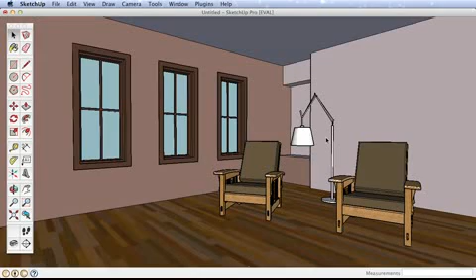In this video, we'll create an interior room, something you may create to test out paint schemes or furniture arrangement. We'll build out the basic room, apply some simple colors, and then use the 3D Warehouse to find furniture we can put in and arrange.

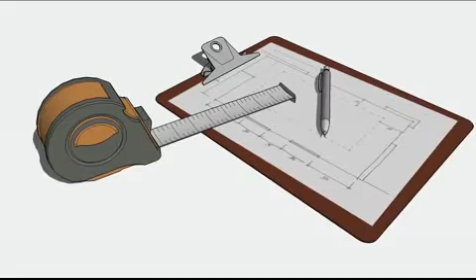If you're creating your own space, the first thing you'd need to do is take some basic measurements of the size of the room and where windows or other prominent elements are, to accurately recreate the space. We know how to draw accurately in SketchUp from the previous video. For our example, let's begin by drawing a room that is 20 feet long by 16 feet wide, and pull it up to 9 feet.

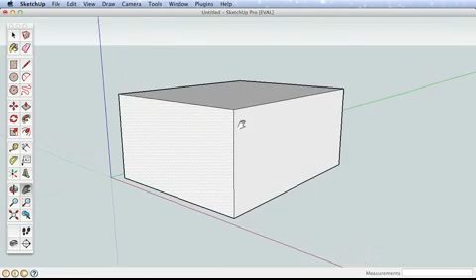When you're working only on an interior room, it's often helpful to erase some of the walls, and we can always draw them back in later. Using the eraser, erase this corner edge, which will delete two of the sides. You'll see the inside surfaces are a different color from the outside surfaces where we've been working, but it will have no effect on our example, since we're going to paint these surfaces anyway.

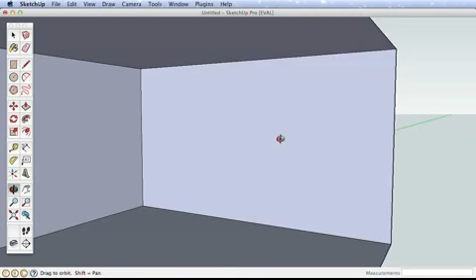Navigate to get a good view of this back surface. Let's use a new tool to help us lay out some guidelines. The tape measure tool can measure between points in SketchUp, but will also create guidelines we can reference.

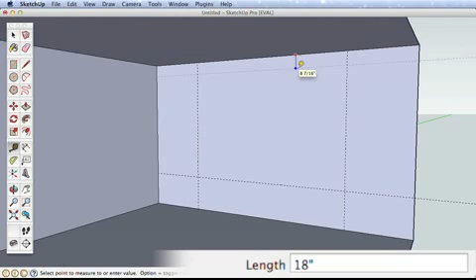Click on this corner edge and pull away. Type 40 inches to create a guide 40 inches from that edge. Now repeat this process from the opposite edge. Create a guideline that is 24 inches high, and a final guide that is 18 inches down from the top edge. With these guides in place, let's add detail to our room by creating a built-in structure.

Draw three rectangles using the guide intersections here, here, and here. Now we can delete our guides. You can delete guides with the eraser tool, but some of our guides are now hidden behind edges.

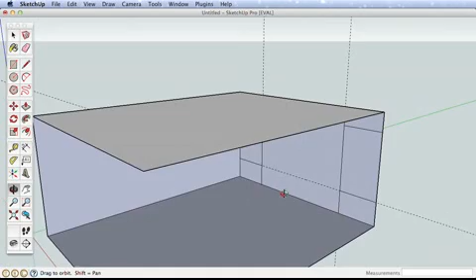You can see this by zooming out. Zoom out far enough to see all the guides and erase them, or you can also delete all the guides in your model by going to the Edit menu and choosing Delete Guides.

Navigate back into our room. Use push-pull to pull this middle surface out 24 inches. Now pull this lower surface out 18 inches.

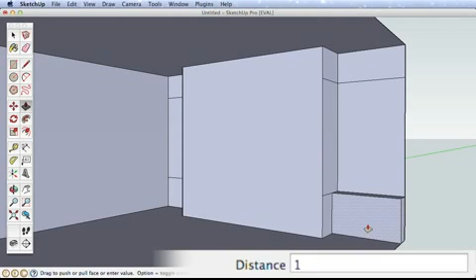We need to pull the far surface out 18 inches as well, but rather than manually inputting the distance, we can use inferencing. Click once with push-pull on the far surface to start pulling it, and leave the surface with your icon. Watch how hovering over various surfaces will pull it out to match. We can simply infer to this near surface and click on it to finish.

Try again on these upper surfaces. Pull one out 12 inches, then pull the other surface out and watch how it will infer to the other surfaces. Remember, you'll click once on the first surface to start the push-pull, but you'll finish by clicking on the other surface.

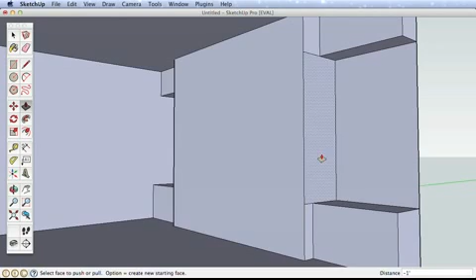It's good modeling technique to keep your model clean. Let's erase these extra edges created from our push-pull. Anytime you have surfaces that are coplanar, you can erase the edges separating them. This is called healing the surface. Zoom in if you need to erase the unnecessary edges.

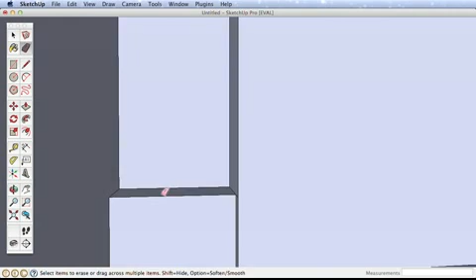We need to navigate to the other side and erase those edges as well. When you do, it's tricky to find the ideal view, and it's easy to orbit outside of the wall surface.

Try this: navigate back to a full room view, then choose the Zoom tool. Watch the Measurements toolbar, it shows your field of view. You can change this just like changing the lens of a camera, allowing us to see more perspective in our view, which is particularly useful for interior scenes.

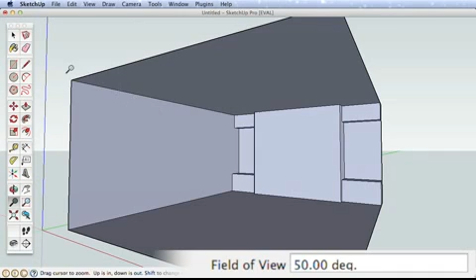Type 50 and press Enter. Now the field of view shows 50 degrees, and we have a broader view of our scene. Navigate back to the corner and find a good view to erase the extra edges.

With that done, let's turn our attention to creating some windows. Navigate to a good view of this wall and use the tape measure to create a guide 5 feet from the far wall. Create another guide 30 inches from the first. Now create a guide from the bottom edge and infer to our built-in structure to finish it. Do the same from the top edge so our windows will line up with other elements of our room.

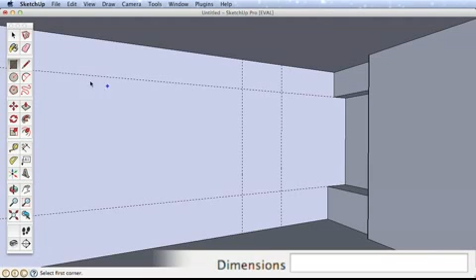Draw a rectangle using the guides for our window. Our room will have 3 windows on this wall and they are 18 inches apart. Create a guide 18 inches from our new window.

Now select the new rectangle, then the Move tool. Move the rectangle from this lower corner and start moving it along the wall. While still moving the rectangle, press the Control key on a Windows machine or the Option key if you are on a Mac. This leaves the original shape and creates a copy for you to move. Use the guideline reference to place the new rectangle.

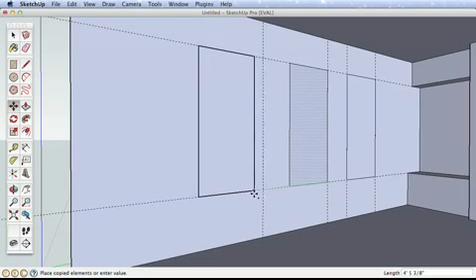Practice this again for the third window. Create a guideline 18 inches from the new window, select, and move a copy of the window by pressing Control or Option on a Mac, and remember to move it exactly by moving from a corner to a corner. We are finished with the guides, so go to the Edit menu and choose Delete Guides to erase them all.

To make the windows more detailed, we'll use the Offset tool and introduce some new tips to help you work quickly. Zoom into one of your windows and offset the surface inwards 3 inches. Then select the inner surface and offset it 1 more inch.

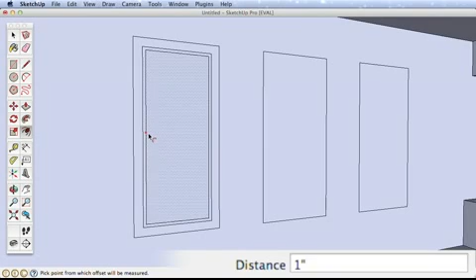Now use the Line tool and draw 2 crossing edges from the midpoints of the inner surface. Finally, select one of the new rectangles created by the crossing edges and offset it in 1/2 inch for a window mullion.

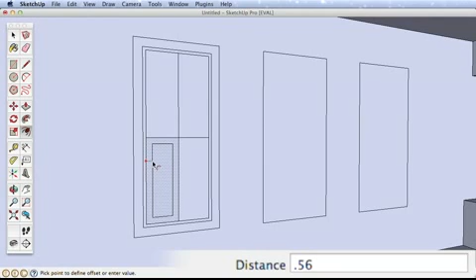SketchUp will remember the last distance you offset, so rather than typing in a value for the remaining window mullions, select another surface, then using the Offset tool, double-click on that surface. It will offset it the exact amount of the last offset. Try again on the remaining 2 rectangles, select the surface, then use the Offset tool and double-click to quickly offset it by the last amount.

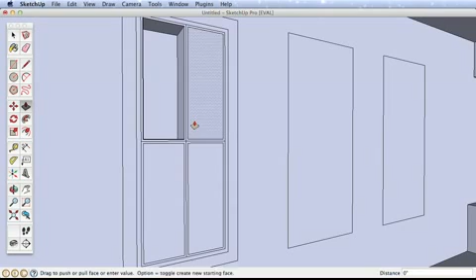Double-clicking also works with push-pull. Try selecting, then pushing one of the windows in, then select a new window and double-click with push-pull on a different window. Continue this for all windows. Select the surface, then double-click with the push-pull tool to push it to the same distance.

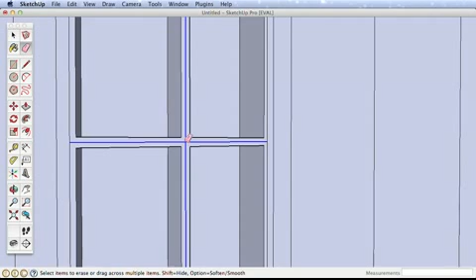To push the window mullion back, let's first zoom in and erase the crossing edges to heal this into one surface. Then push it back and also pull the other surfaces in or out to create an interesting window and frame.

Now we need to repeat this process for our remaining windows, and because we've built one, we can use inferencing to quickly repeat the process. For example, I can offset this surface from this lower edge and infer to our completed window for the correct distance. Although we are offsetting the whole surface, choosing the right edge to start the offset will determine which inferences are available to you. So in our example, we want to offset from horizontal edges to infer to parallel edges.

Offset the frame, inferring back to the complete window. Divide the windows with 2 edges drawn from the midpoints. Then offset one surface using inference, and the remaining window surfaces by double-clicking as before.

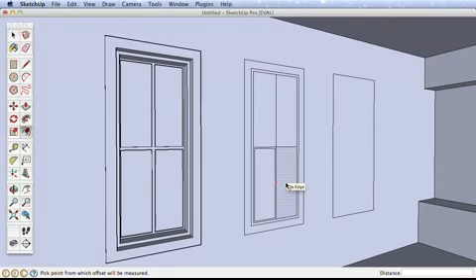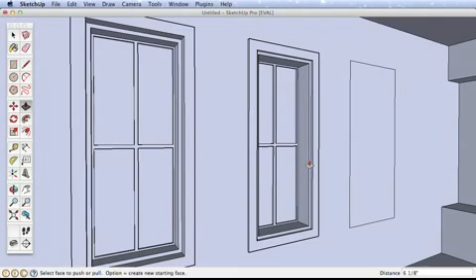Use push-pull and inferences to complete this window so it's an exact replica of the first window. This third window is available for you to continue practicing on. Repeat the steps we've taken to replicate another window.

Of note, we are drawing these windows manually to practice these drawing techniques. But in our next video and other videos, you'll learn about better techniques for creating copies and repeated elements. But that is beyond the scope of this video.

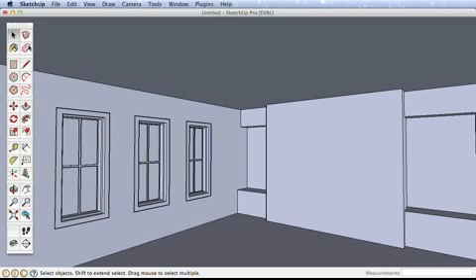At this point, our example has some interesting details, but color would help a lot. Let's apply some paint and materials. Applying color is one of the few tasks that is slightly different on Mac versus Windows, so we'll cover both. The basics are the same though: pick a material and paint it to the surfaces in your scene.

Select the Paint Bucket tool to bring up the Color or Materials browser. On a PC, you are shown a default palette of colors to pick from, and on a Mac, you are given a color wheel to pick colors from. Choose a color and then click on a surface to paint that color. Continue painting surfaces in your model, pick different colors, and try some various color schemes in your model.

Navigate around as needed to get different sides for your walls, but don't paint the windows yet. For the windows, we'll introduce a tip to make the process easier. To start, let's pick a pale bluish color to represent the glass in the windows.

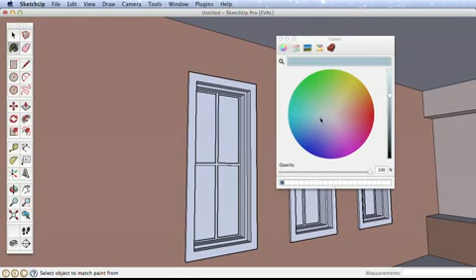The trim has lots of little surfaces to work around and paint. Try this: since our window trim is all still the default blue color, we can paint it all at once by holding the Control key on a PC or the Option key on a Mac. Choose the trim color, hold down Control or Option, and click on one window trim surface to paint all connected surfaces of the same color.

With one window done, we can quickly complete the other two. However, we need the bluish window color again. With the paint bucket active, hold the Alt key on a PC or Command key on a Mac to turn the paint tool into a sampling tool. Click on one of the painted windows to sample and pick that color for use. Now paint the remaining windows, then hold Alt or Command again to sample the trim color, and paint the remaining trim as before by holding the Control or Option key.

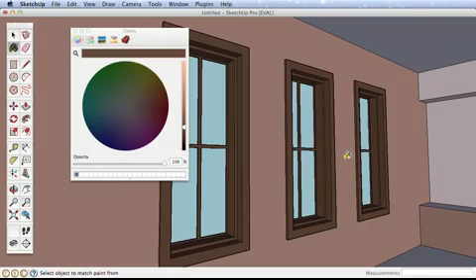In SketchUp, you can apply full textures and materials, not just colors. On a Windows machine, click the house icon to see what materials have been applied in your model, and open the Fly Down menu to access textures to paint in your model.

On a Mac, choose the brick icon to access additional textures. Paint some more materials into your scene as you'd like.

It's also possible to create your own textures to use in SketchUp. See our documentation for more information.

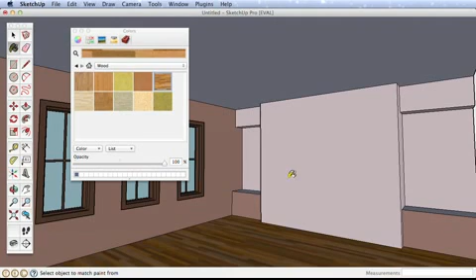To complete this example, let's add some furniture from the 3D Warehouse, which is an online repository of models where anyone can upload and share SketchUp models, and there are thousands of models available. As long as you are connected to the internet, you can search the 3D Warehouse directly from SketchUp.

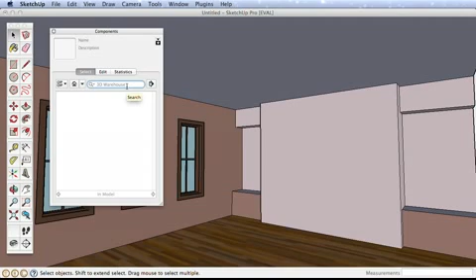Go to the Window menu and choose Components. With the Components menu open, use the search bar to find models in the 3D Warehouse. Searching for a chair will return thousands of results, so be more specific to refine your results.

Simply click on one of the results, then place it in your model. With the new model in your scene, let's look at how to properly move it around the room.

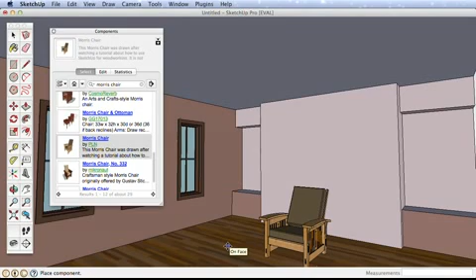The chair is grouped together, and we will learn more about groups in the next video, but objects that are grouped can be moved and rotated like a single object with the Move tool. Select the chair, then pick the Move tool, and hover the cursor around the chair.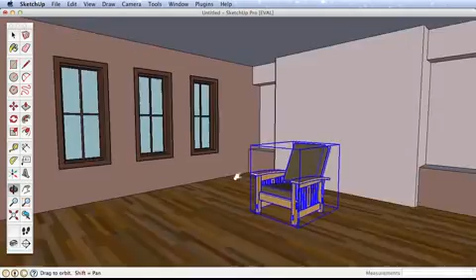There is a bounding box indicating the group, and small red points show up on different sides. Hover over one of the red dots, and a rotation gizmo appears. Click on the red dot to rotate the chair in that axis, and click again to finish. You can rotate freely or in 15-degree increments by hovering the cursor close to the rotation gizmo.

Orient the chair as you'd like, and let's talk about moving it in your scene. You may want to move the chair over here, and suddenly it's buried in the floor. Probably not what you expected.

Let's undo that. When you move objects in SketchUp, you always need to be aware of where you are starting and finishing the move. For example, if I click on the armrest to start moving the chair, it will move that point to other elements in the scene that I hover over.

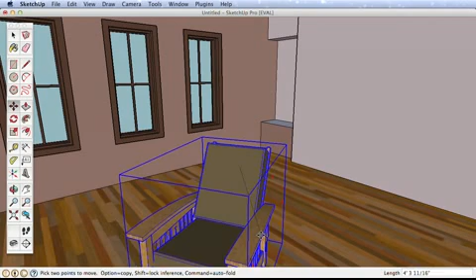To be sure the chair stays on the floor as I move it around, I'll move it from a point that should touch the floor, the leg corner for example. Now I can move it easily to another point on the floor.

Another way to quickly move it is by pre-selecting the chair, then using the Move tool. I can click on some point on the floor and move it to another point on the floor. Remember though that you started moving from this point on the floor, so you must move it to another point on the floor. You can still move the chair up by moving it to some point on the wall.

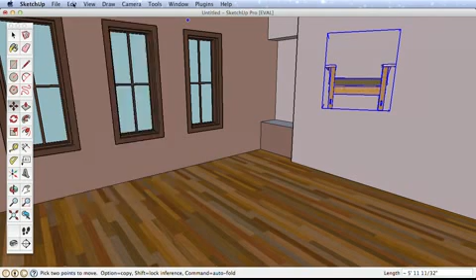Always be aware of the red, green, and blue directions as well, so you don't accidentally move the chair straight up. Remember as well you can press the Control key on a PC or the Option key on a Mac to create a copy while moving the object.

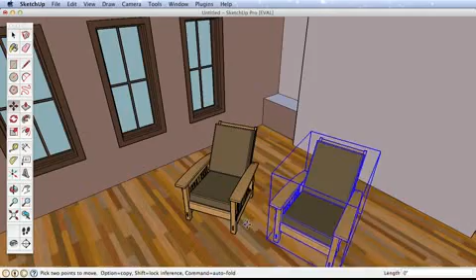Now practice by finding more items from the 3D Warehouse to add to your scene and placing them around the room.

In the next video, we will learn about creating groups and copying objects by creating a small table.